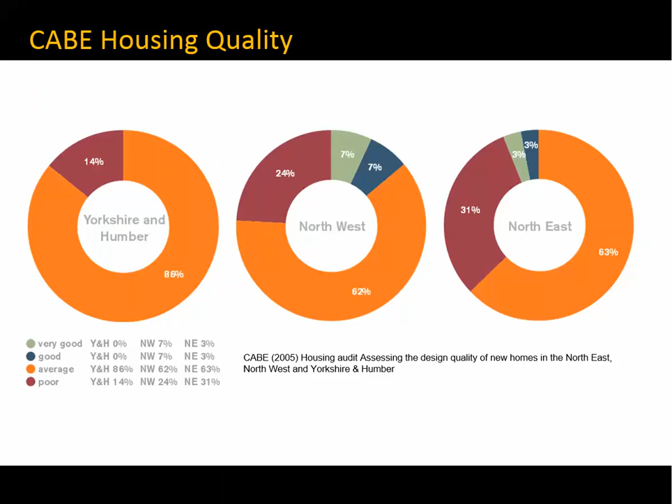So you've really got to wonder what's going on in the construction industry. And if you think a bit further, or analyse it a bit further, you find...

...that in the UK we're constructing some of the smallest homes in Europe. Here you can see the UK brought out in red, and the homes are often around 75 square metres. It's only in certain places like Sweden, Portugal and Italy that they're building 80 square metres and above. Meanwhile, other parts of Europe, Germany and the likes, areas of Spain, they're building near 100 square metres as an average household size.

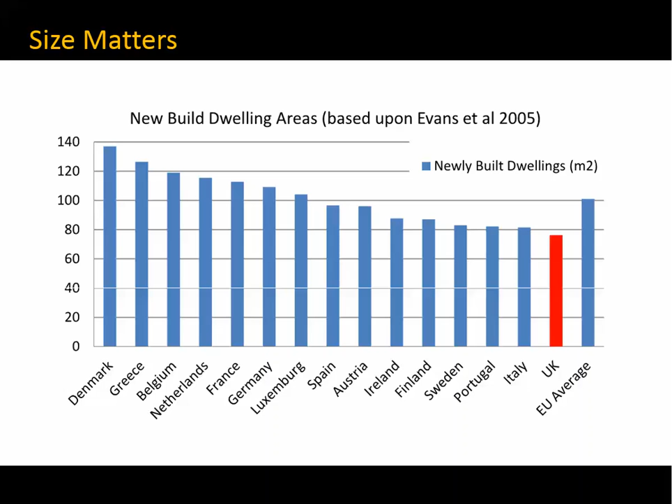One thing to recognise also is research from the University of Exeter Medical School, released in 2014, which reported that the UK has one of the highest rates of asthma in the world. They did a study of 700 new properties and found that poorly ventilated homes are also likely to increase people's exposure to other biological and chemical physical contaminants.

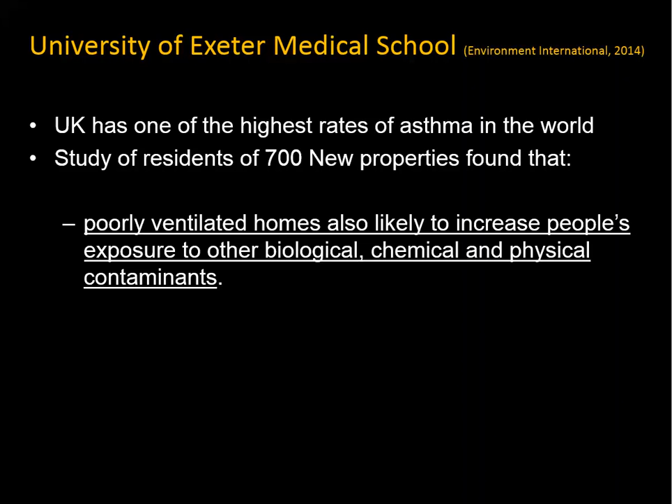So, basically, in a nutshell, a building that's not ventilated properly can make you ill and have an impact upon your health and well-being and the health and well-being of you and your family.

Meanwhile, we've got a study done by the Technology Strategy Board looking at the different ways we ventilate buildings, in particular the little trickle vents you get on windows. What they found was that in a majority of cases, the trickle vents were closed in properties. And if they'd been provided, the appropriate number hadn't always been given.

What they found was that people were closing them because of discomfort, undermining the indoor air quality they might otherwise have been expecting. In fact, researcher Sterling Howieson in 2014 highlighted that an airtight home with trickle vents is likely to result in a more toxic and hazardous indoor environment, with concurrent and significant long-term and insidious impacts upon public health. He also said that the methodology underpinning the current regulations cannot be considered credible. So, some really damning indictments of natural ventilation strategies, trickle vent strategies.

There's also been research done by the Building Services Research and Information Association, or BSRIA, an industry body. They did 40 random inspections on different properties, and found that 95% of the dwellings being constructed, in theory to the building regulations, actually failed to achieve that standard.

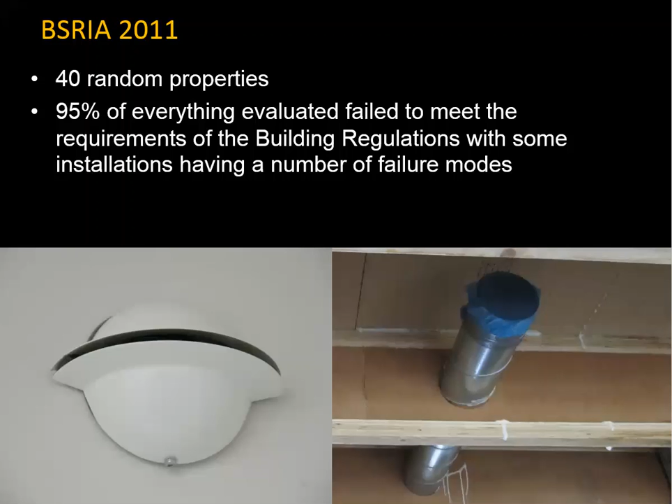And a number of those properties having a number of failure modes. So some really significant problems with mechanical ventilation systems as well, it would seem, out in the popular elements of the construction industry.

So if we take it one stage further, there's some research that I did with Jack Harvie-Clark from Apex Acoustics. We reviewed over 1,000 homes, studies that had been done by academics, and what we found was that the noise levels were always too high from mechanical ventilation systems. The consequence was that people tended to switch off or switch down the ventilation systems, which compromised indoor air quality. The disappointing thing we found was that building regulations makes a recommendation of 30 dBA, which you can consider to be around about talking pitch for a person.

So that's more than a little bit noisy, and we've also managed to unearth some key bits of information here that suggest we should be trying to target much quieter noise levels so that we only disturb around about 5%, perhaps 10%, of people.

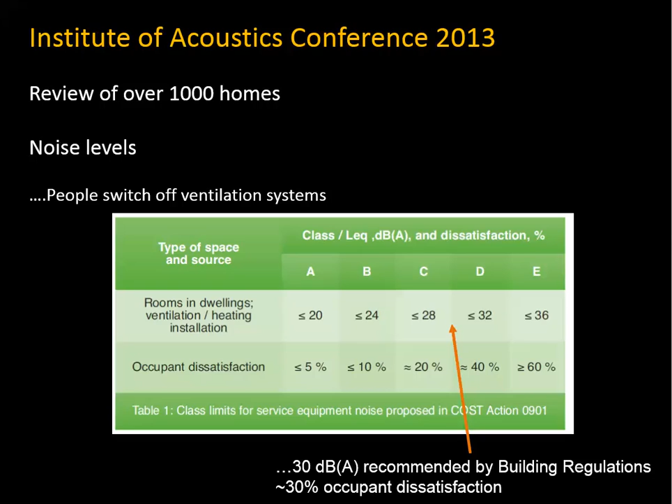There's also been research done by Leeds Metropolitan University that has examined, over the last 20 years, the actual measured performance of buildings. As building regulations move ahead, buildings are costing more and more money because you're spending more on insulation, on draft proofing techniques, etc. And what their studies have shown is that the buildings haven't been performing properly.

What you've got in blue here is the predicted performance, and in red is the actual measured performance. Over on the right-hand side, you can see two bungalows - two properties that I was involved with, and I'll talk about those in more detail in a moment. You can see that though there is a very marginal difference, it's actually within measurement error, and it's therefore kind of acceptable performance.

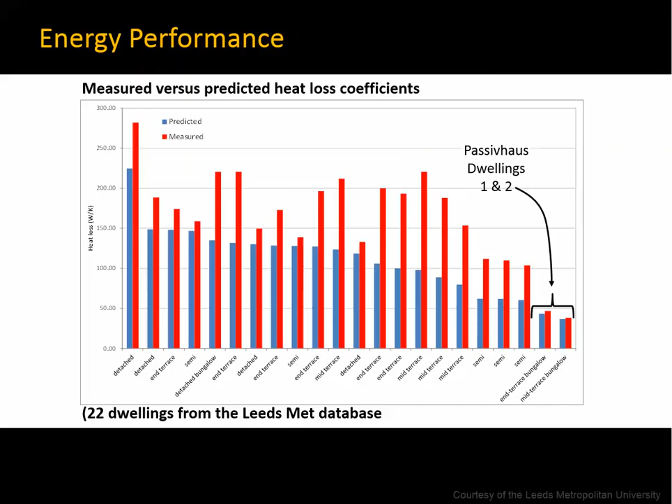It was the first project of its kind that Leeds Met had ever found that was performing as predicted. So the racecourse estate, as it's known, was quite a groundbreaking project in that respect, and not just in terms of its energy performance, because we spoke to the people living in the properties.

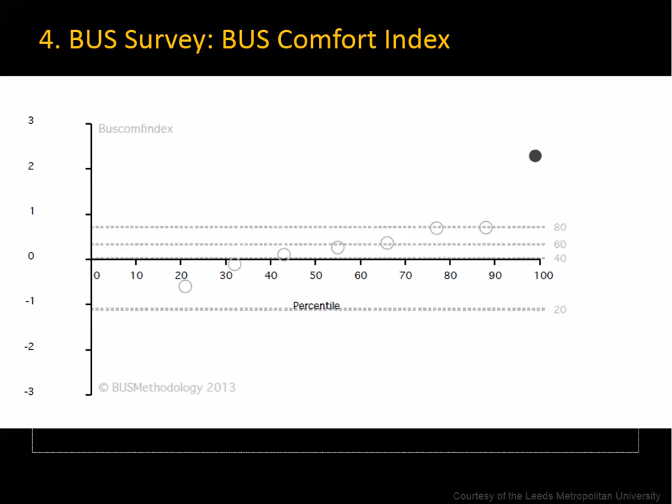The level of comfort that people are experiencing is reported to be very, very high, and we know that this has got some statistical validity to it.

And then also in terms of people's satisfaction, so in terms of the space provision, the design, the aesthetics, the usability, the practicality of the houses, all of these things as well. Once again, you can see that compared to the rest of the database, racecourse is performing very well indeed. And what you've got there is some replicable concepts.

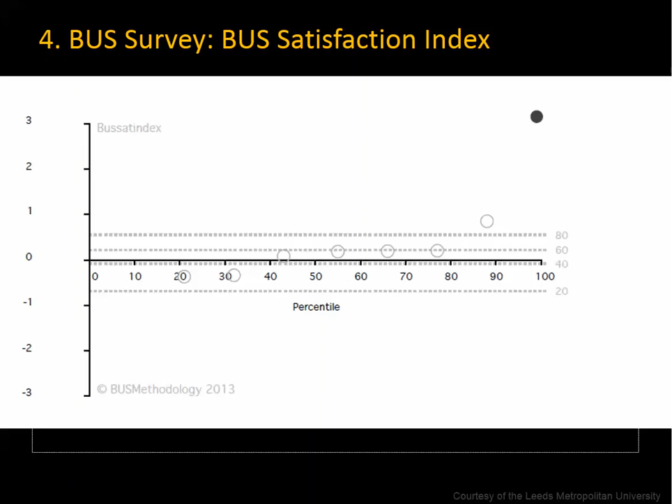Now, if we go back to thinking about ventilation for a minute, there was a study done by the Technology Strategy Board of 54 homes across 46 sites, and it showed time and time again that the homes built to the Code for Sustainable Homes, or built to building regulations in the standard sense, were failing to actually provide adequate ventilation 81% of the time. Meanwhile, the passive house buildings within that study were performing correctly, either meeting or in a borderline condition, 95% of the time.

So there's a chalk and cheese kind of contrast there - if you want good indoor air quality, if you don't want to get asthma, if you want to avoid respiratory issues, if you don't want to be getting ill as much, then you need to make sure that the ventilation's right, and the quality assurance methods behind passive house seem to be key.

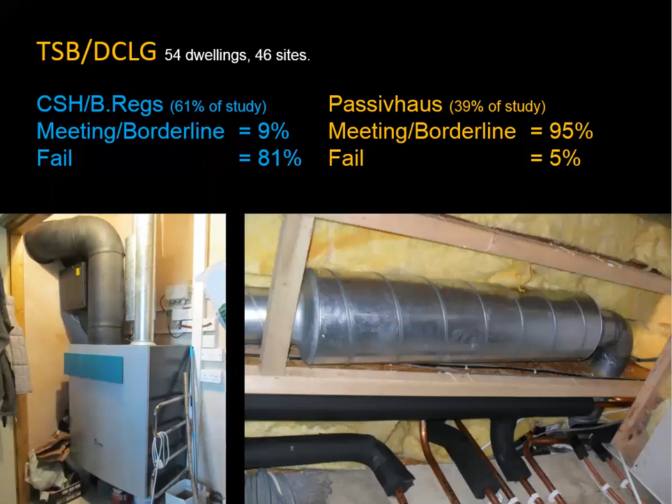Jack Harvie-Clark, the acoustician I mentioned earlier, came along to the racecourse estate and did some measurements, and he found that the acoustic performance as delivered was actually very acceptable, definitely within acceptable parameters. The loudest things, the things that distorted the readings, was actually the ticking of a clock. So the building has been designed in such a way that you're not really getting any background noise from the mechanical systems that would disturb your sleep, because it's been designed appropriately.

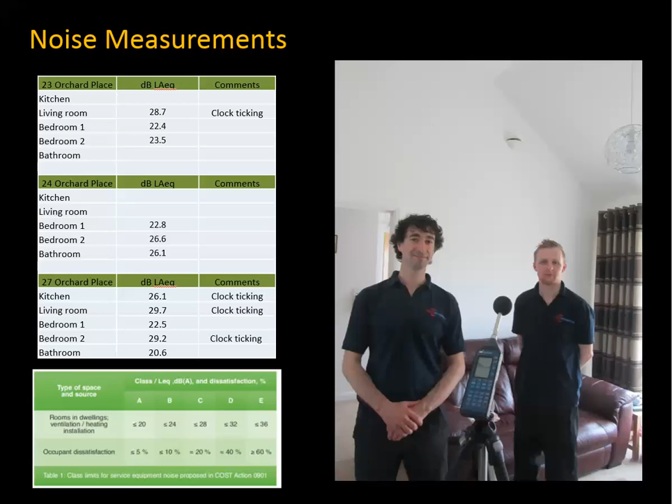The clean, constant fresh air has helped with my breathing, as I suffer from heart problems and asthma. Also, getting about the bungalow is a great help to my mobility, back problems, knee and hip problems. So, some really positive feedback there. And in fact, there's another piece of feedback from somebody that had arthritis, and they reported that their symptoms had receded significantly as well.

Alan Thompson from Gen 2 Construction, his feedback was very kind: Mark's technical knowledge of low carbon design and building performance is breathtaking, and importantly for me, he also has an eye on what it would take to construct, from a construction perspective, to build these groundbreaking homes. So he's got no hesitation in recommending me, which is very kind of him.

Meanwhile, Wolfgang Feist from the Passive House Institute said about me: Mark is one of the pioneers to introduce Passive House to the UK. His experience and ongoing research into building performance makes him one of the UK's most skilled and knowledgeable Passive House architects. I've no doubt that Mark Siddall's buildings also offer an economical and attractive solution to investors. So again, more praise, very kind words there.